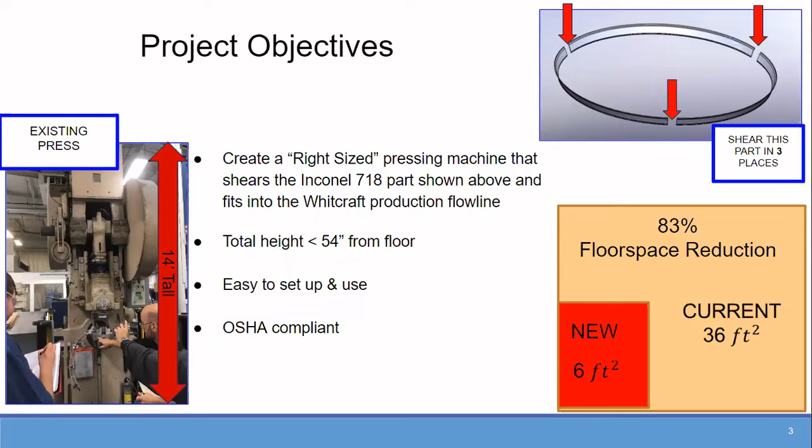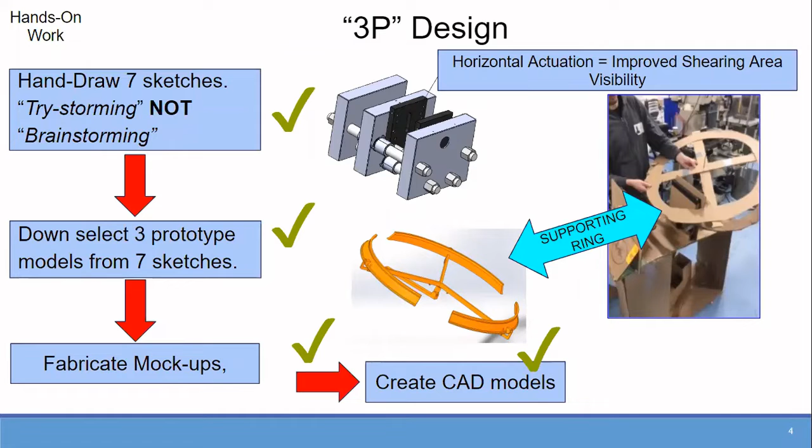This press is much too large for this application, so our team has been designing a press that will be only 6 square feet on the floor, stand no taller than 54 inches, is easy to set up and use, and is OSHA compliant. In order to do this, we utilize a 3P down selecting process where you start with 7 sketches, choose the best 3 of those, and then continue to make 3 cardboard models of those designs. When working with cardboard, it is much easier to identify and iterate on problems because you're working in the physical space, and from there you can go on to create CAD models for the final design.

So we have here 2 of our CAD models. The one on the right is our November 2019 version. After sitting down and consulting with our sponsors, we were able to determine that this was not a manufacturable design. So we then went back and had to make some changes. On the left here is our final May 2020 version. It fits all of our objectives with being an easy setup. It's portable via pallet jack. It's right size for the flow line.

We have included some black polycarbonate paneling around the bottom half of the frame. And then we have also included some access doors on the sides and the front for easy maintenance. Up on top, you can see the clamping ring prototype that we have included. This is where the operator would put the ring of Inconel 718. It swivels up and down, so they would place the ring, swivel it down, lock it into the die set using the 2 green push buttons on the front there.

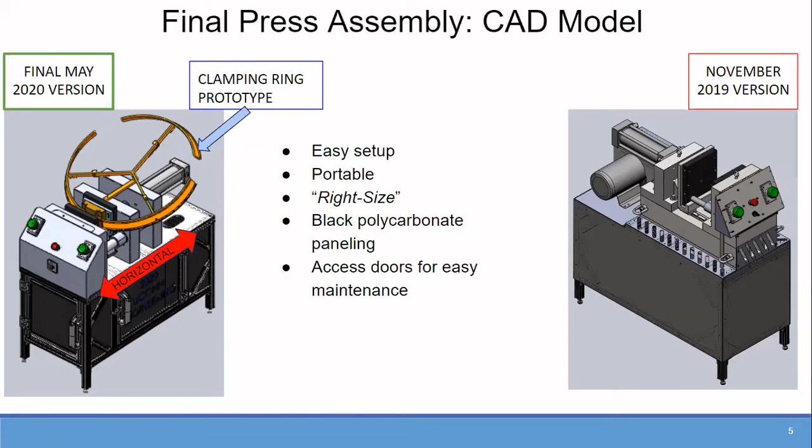It would actuate the hydraulic cylinder, shearing the ring, and then they would be able to swivel the ring back up, rotate it, and lock it down into the die set again, repeating this process to get the 3 cuts needed. So here we have a couple pictures of the 80/20 that the frame is made of. It's aluminum T-slot. On the left, we have the uncut stock, and on the right, we have our working frame build.

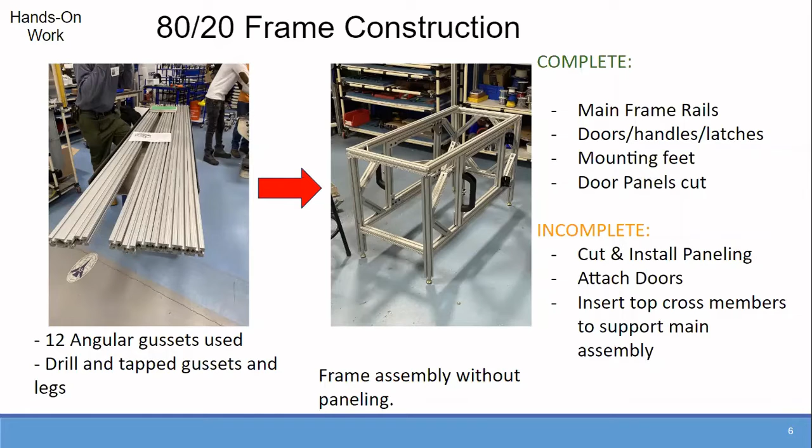For the analysis component of our project, we begin with the stress strain diagram for unhardened Inconel 718, shown in the figure on the left. The failure point for this material occurs at approximately 130 KSI, and to figure out how much force we need to actually cut this part, we begin with the shearing force equation shown in the figure on the right below the shear blade in the part. The industry standard for this is 0.6 times the ultimate strength of the material. We chose to go with 0.8 to be more conservative and guarantee a good cut.

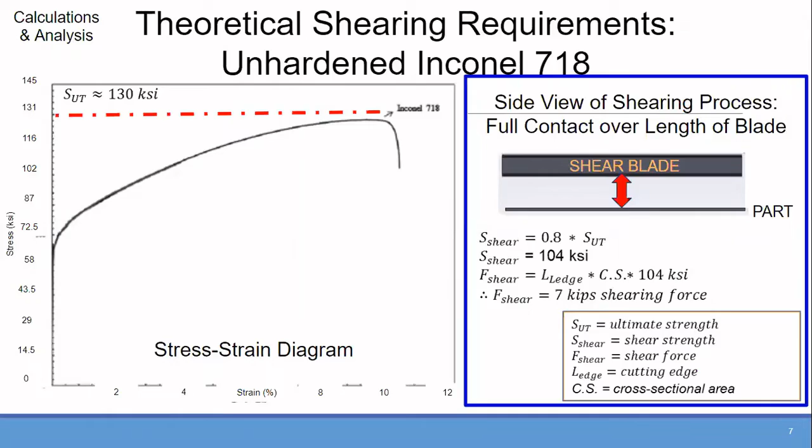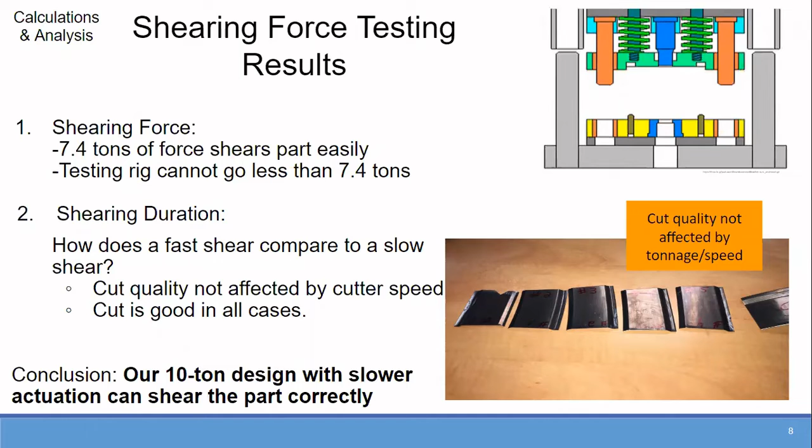If we skip down to the force shear, that's simply the length of the cutting edge times the cross section times the force required to fail the material. This yields a shearing force required of 7,000 pounds. To test this, we ran a trial at Whitcraft with a testing rig that could not go less than 7.4 tons. The 7.4 tons sheared the part easily. The cutting speed did not affect the quality of the cut. Thus, we concluded that a 10-ton hydraulic cylinder would be more than adequate to produce a good part.

The FEA component for our project began with the figure on the left with our original design, which, as Dan said earlier, was unmanufacturable due to the small radii and sharp corners. The maximum displacement was 7 thousandths at the top of the die shoe with an applied force of 10 tons. In the picture on the right, we see our new design, which is modeled after a catalog Danly die set. It consists of 4 C1050 steel rods positioned at the bottom and centers of the die shoes. This helps to distribute the load more evenly. And we can see that it has a maximum displacement of 5 thousandths, which is half of the 10 thousandths displacement allowed by our sponsor.

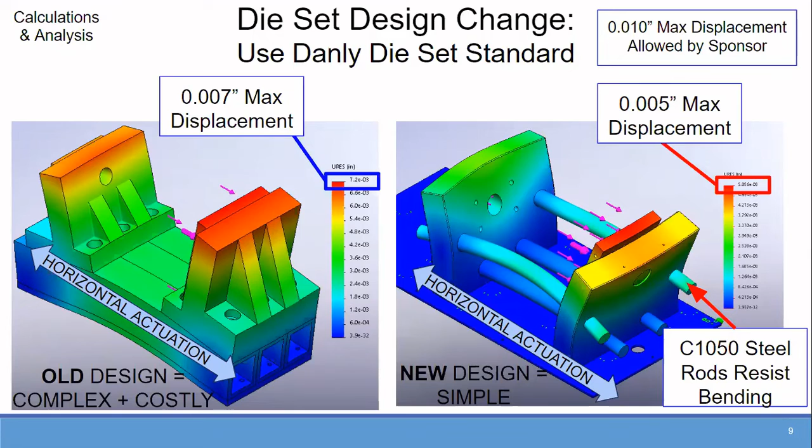The project status as of April 24th, 2020: we have completed the design and stress analysis of the press and die set. We have ordered and received all of the hydraulic components and electrical components, as well as the 80/20 frame components. We have sent the schematics of the die set to the engineering department at Whitcraft to be ordered from Danly. We were unable to test the electrical or hydraulic systems or run any dry cycle testing on the press, and we were unable to shear an actual part.